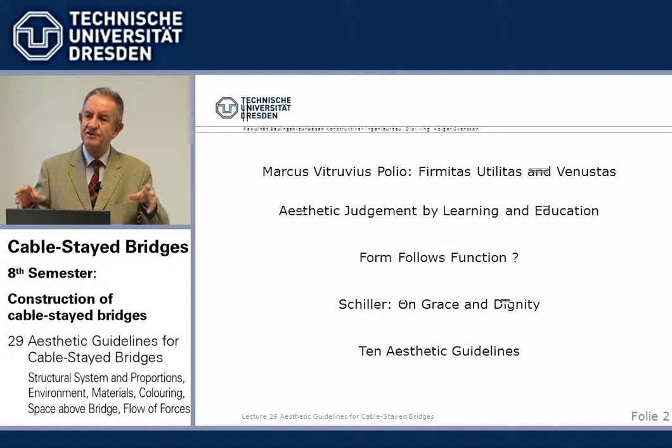And he comes to the conclusion that a beautiful structure has to fulfill rational requirements, form follows function, as well as more felt requirements. So I like to say he combines the two considerations on a higher level, dialectically. This is, I think, the answer. It must be rational and it has to fulfill some requirements from feel.

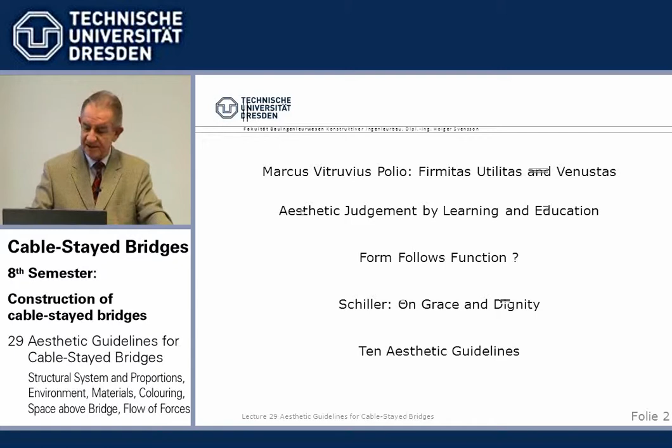We will today deal with the rational requirements, and for that purpose I have developed or summarized 10 aesthetic guidelines which can be used to judge a structure. It's not a recipe for, like, a cooking recipe - thou shalt apply these rules and then you will reach a beautiful structure. No way, this can't be done. But it can be helpful if you're sitting with a design or looking at another design to have a way to check various points whether they are fulfilled.

And by constantly looking and judging structures, that is what I call learning aesthetics, by being aware what is beautiful and what is not and why. So these 10 guidelines, from clear structural system to, I always say, above all, simplicity, we will now go through with examples.

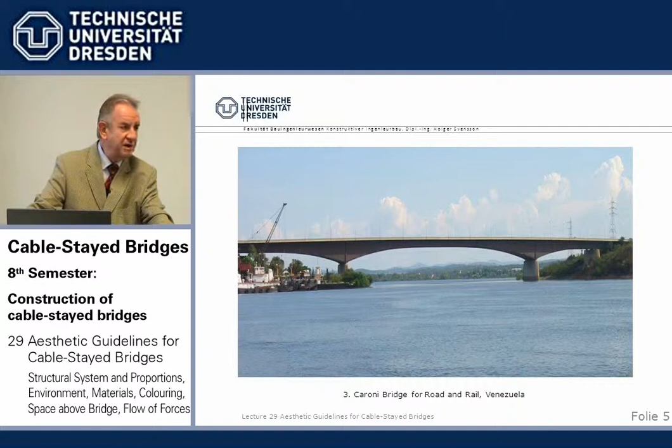A clear structural system is a requirement so that even a person uneducated in structural engineering, when he looks onto a structure, feels there is a right flow of forces, or a layman also has a fine feeling if there is a wrong flow of forces. So a clear structural system - we start with a continuous girder, deeply haunched. This is for road and rail, and it's very clear how the loads are transferred by bending, and where the biggest bending moments are over the piers, there is the greatest depth, most material.

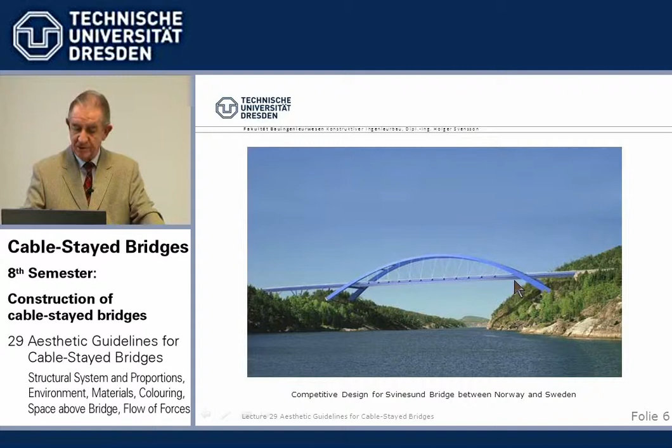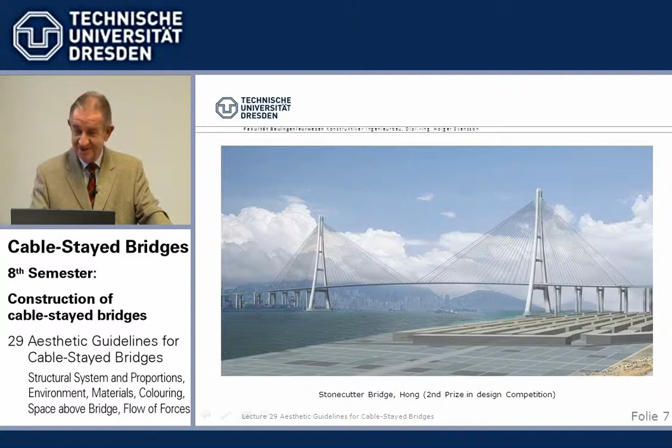A cable-stayed bridge shows a clear system. We have a light beam hung up by towers, and the connection is done by cables. This, by the way, is a second prize for the stonecutter we did. We didn't win, we were runner-up, but it still hurts. I think it's a beautiful bridge we designed there.

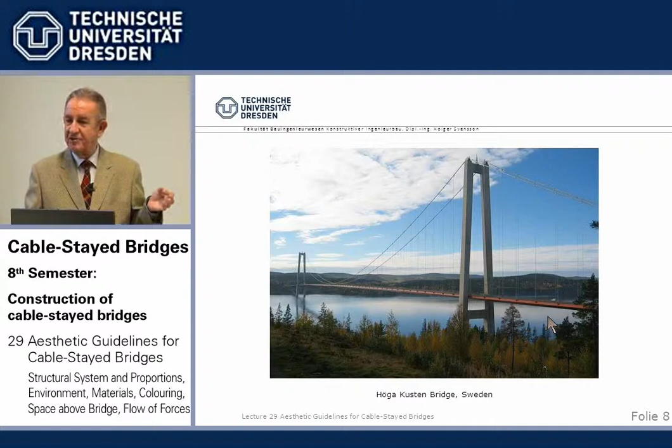The depth ratio above the piers and in the center should be close to 2 to 1. And the second rule is the depth of the beam in the center and at the piers should be the same, and it should run horizontally, as a tangent, with the underside parallel to the top into the end structure. If you just follow these rules, 2 to 1, same depth, and ending up parallel, you will nearly always design a good looking haunched girder.

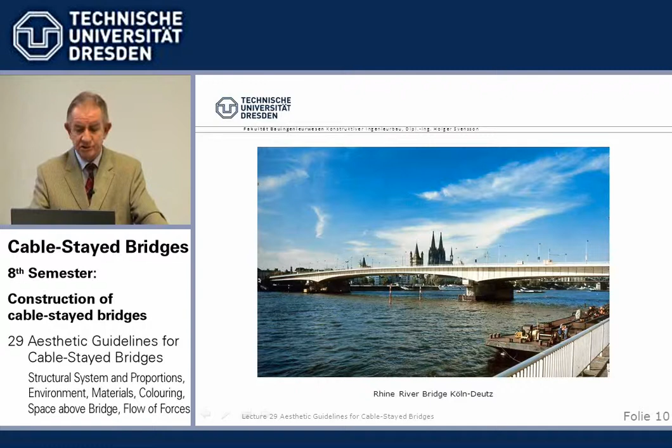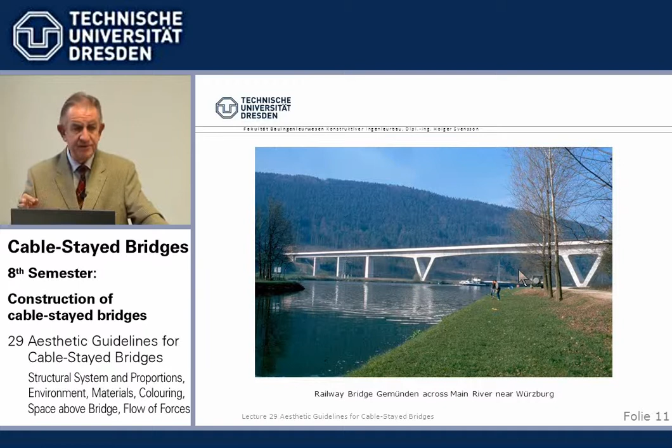An arch bridge also has simple base rules. Again, we have the rule 2 to 1. The ratio between the arch depth and the beam depth should be in the ratio of 2 to 1, or 1 to 2. It doesn't matter.

It can be the other way around. You can have a heavy arch which also carries the bending stiffness, and a light roadway slab just hung to it. Then the arch has 2 and the beam has 1. But you must not use the same depth for the arch and the beam. 1 and 1, if you do that, it looks dull. You need a certain contrast inside the structure. So never make it 1 and 1. 2 and 1, this way or the other.

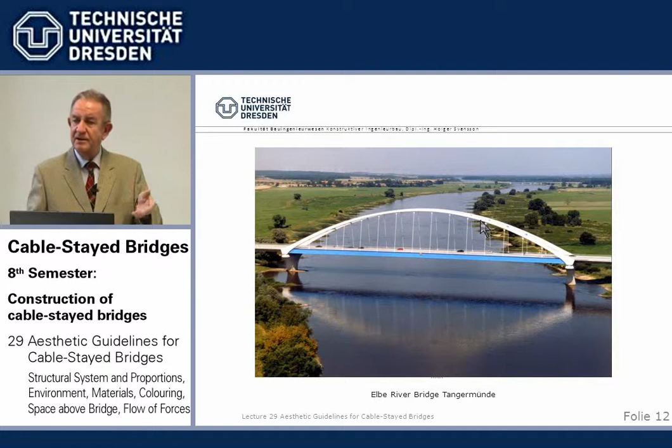And of course, color here can help. Dark color underlines the thickness of the beam, and light color highlights the slenderness of the arch.

Next rule, good order. Very important. We must minimize the different directions of members in a structure to a minimum.

Good order can easily be demonstrated in the arrangement of stay cables for cable-stayed bridges. The simplest way is the harp system, cables in parallel. And if we have only one center plane, there are no intersections, nothing. That's the simplest arrangement of stay cables you can have.

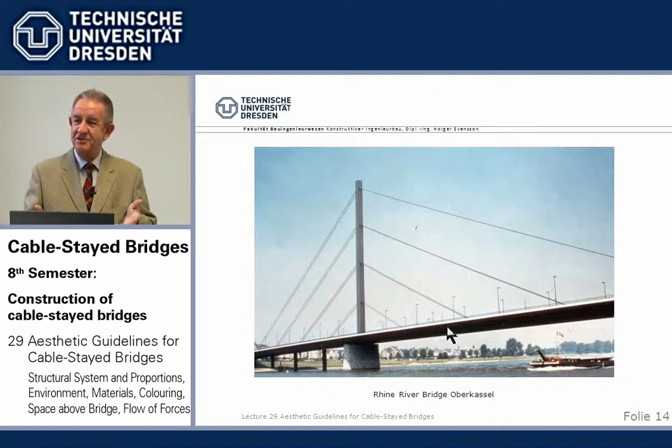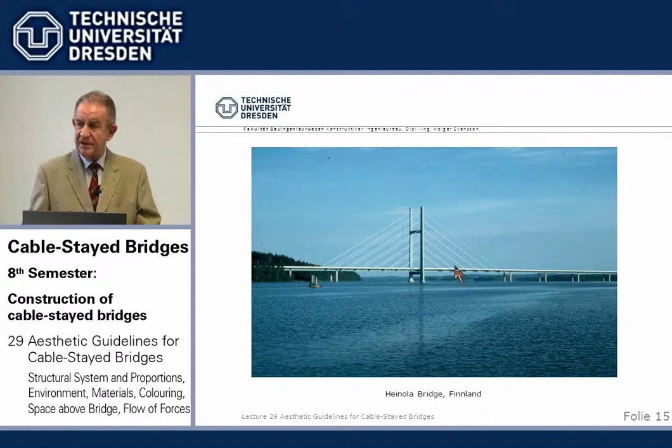Also, when you have two cable planes in a harp arrangement, there are no visual intersections even when viewed skew, from an angle. That is the big advantage of the harp arrangement.

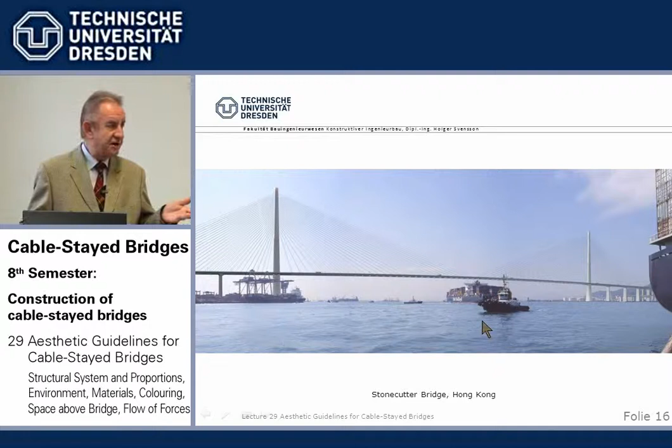Now we come to the fan. You will remember from earlier lessons that the fan arrangement is a little bit more economical. It needs a little less cable steel and less bending in the tower, so it's the usual system. And if we have, like here for Stonecutters in Hong Kong, just one central plane, there are no visual intersections of the cables, and it looks very orderly.

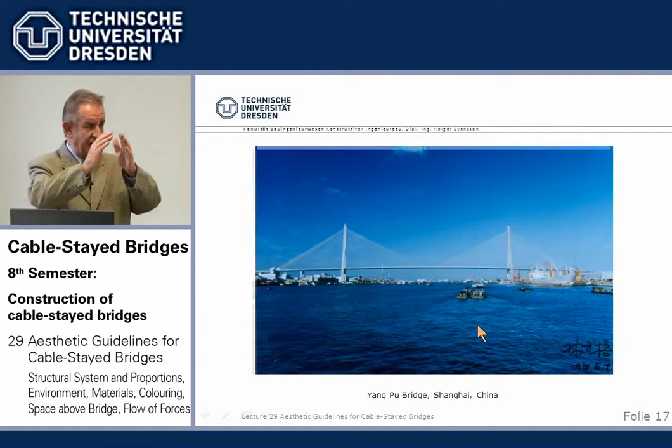However, when we have two cable planes in a fan arrangement, we get visual intersections between the stay cables when viewed from the side. This can, however, be mitigated firstly by using an A-tower, because then the cable planes at the top are very close together, as is the case here for Yangpu, and intersections become less.

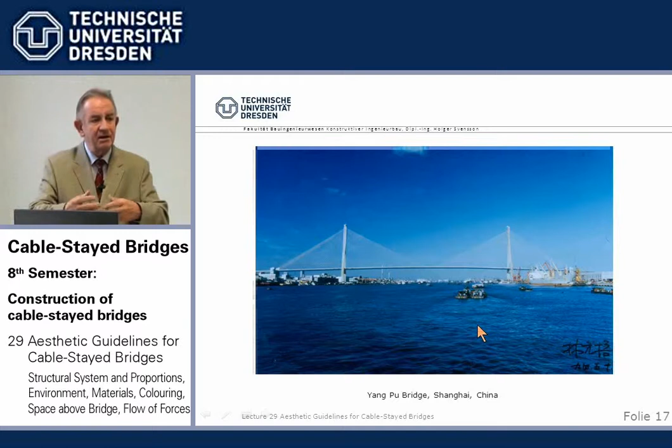Secondly, as Professor Leonhardt used to point out, if we then have many stay cables, like Yangpu, which was a world record in 1994 with 602 meters, the many cables appear like a veil, ein Schleier. So in this veil, these intersections somehow disappear.

4 planes of stay cables we used for the Baytown Bridge, because we needed 2 independent beams for each direction of travel. So even here the towers are designed as simply as possible. I don't think you can design simpler than a pin, which we didn't want. You can design simpler A-towers than we have done here, with constant wall thickness and all that. So that gives the repetition, gives an impression of order.

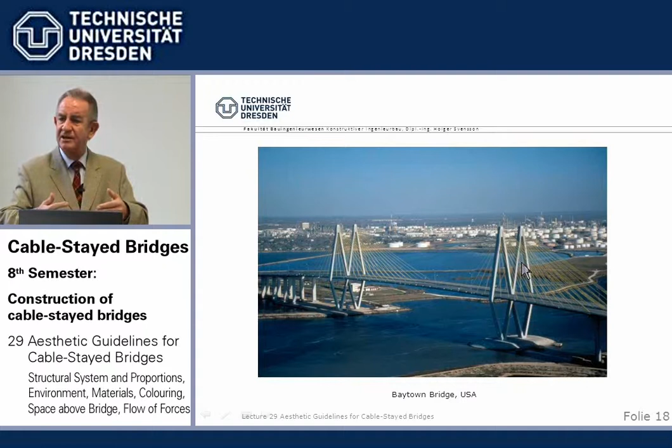And the 4 planes of cables, of course, have the problem that we have visual intersections that cannot be discussed away. But if the bridge is big enough and we have enough, many cables, we approach again this veil impression.

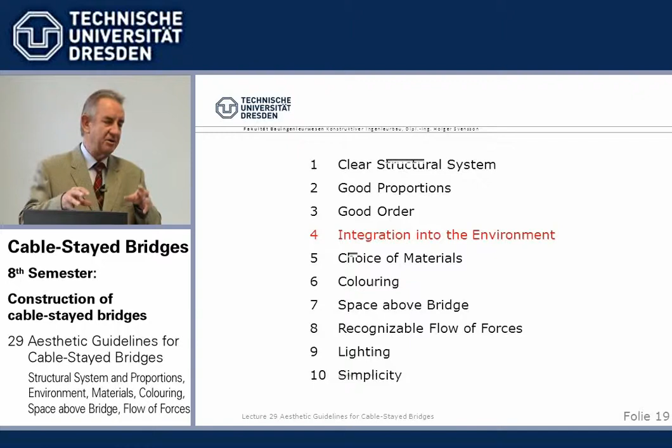Integration into the environment is very important. If you have to design a bridge, you have to go to the site. If you don't do that, if you design especially a major bridge, but for every bridge, just in your office, it's unprofessional. You have to go to the site and find out what is the special feature of this particular location. There normally is one, maybe not easy to detect, and you can only find it if you're there. So go to the site before you start the design to find out what is the special characteristic of this particular site, so that the bridge can be integrated into this particular environment.

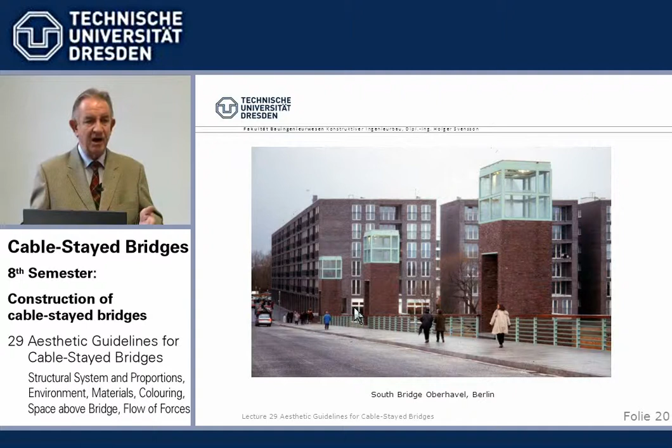In this case, South Bridge Oberhavel in Berlin, the buildings in brownstone were existing when we had the task, together with the excellent architect, Professor Walter Nöbel, to design a bridge here. As a result, we took up the piers on the side to support a special lighting system, because it's mainly pedestrians. At the end, it looks as if the buildings and the bridge were designed together, mainly by the use of the same brownstones for these prominent pier extensions as used for the original buildings. So I think that's a good example of how we can integrate, in this case by use of the same material, into the surroundings.

Another example is the railway bridge Humboldt, across the Humboldthafen at the new main station, formerly Lehrter Bahnhof. Schlaich and Gerkan Marg designed this railway station, and the bridge runs through and had to be concrete also, because those are the areas where you walk on the rail in the station.

An arch bridge looks very well, and so in this case the requirement that we normally use concrete for compression and steel for bending was reversed, because here we have steel arches. But because this had to be concrete, and one wanted to integrate this bridge, which runs into and through the station, with the steel and glass station design, this was chosen. We did the detailed design on the steel part, and I can tell you it was a hell of a job, very difficult. But in the end, from the point of view of integration into the environment, it's a good example.

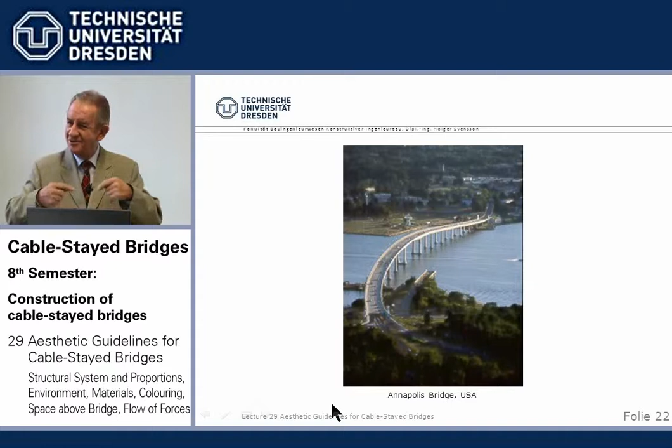There was an existing bridge which had to be removed to build a new one there. We were the only ones entering with a very simple bridge, we think well designed. All the others had load-bearing structures above, be it arches, cable-stayed bridges, things like that - all not necessary, since these spans were good enough. By respecting the Naval Academy in the back and trying to design a subdued, visually low bridge with some detail considerations, it's curved and all things like that, this leaves the Annapolis Naval Academy in its own right. And thanks to these considerations, we won the competition. Myron Goldsmith, a quite famous architect in the US, was one of the judges, and some others, and they saw it exactly the way we had designed the bridge, so we felt understood.

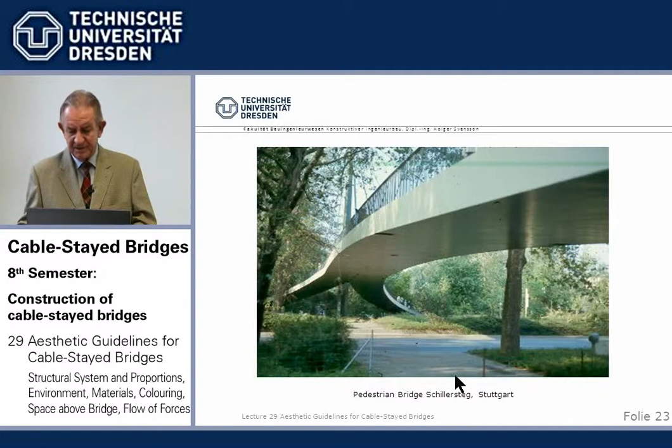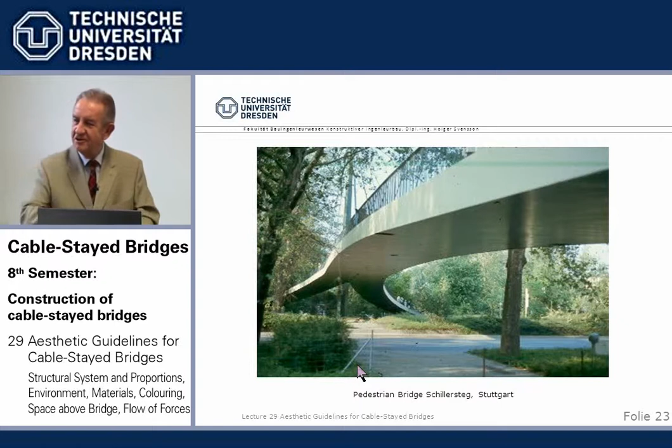Another nice example is in Stuttgart: one of the very early pedestrian cable-stayed bridges, around 1960, across Schiller Street. Before that you crossed the road on level, and there were two natural paths bifurcating into the park, so this bifurcation was taken up in the bridge design. One could have done it straight, but no, the idea was to follow the environment. I crossed over last week when I was in Stuttgart, and it just fits in a very nice way between the parks - another way of fitting the environment.

Choice of materials can have an important aesthetic effect.

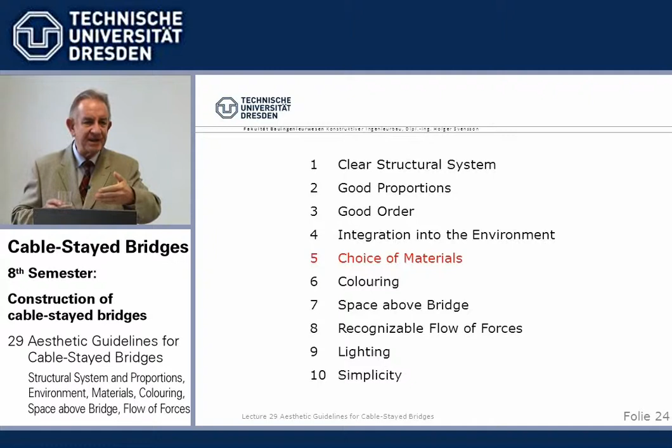This is a little pedestrian timber bridge I designed very close to where I'm living now. I did that 10 years ago, before I knew I was moving to Zeuthen in the south of Berlin, across the Dahme River, beside the Autobahn.

On one hand it's light, compared with a 60-meter clear span, other timber structures are much heavier. The lightness is enhanced because we used steel for the end frames quite consciously, since that's where the big forces come, all the wind transfers and so on have to be taken there. Normally when that's done in timber too, it gets heavy and ugly. So we said timber is nice for the forces here in the span, but here at the end, where we have the heavy frame bending forces, the appropriate material is steel.

Why not? We painted it differently, not in brown. We didn't try to hide it, but used blue as a typical steel color, and brown for timber. This is the appropriate use of materials, because now the end frame has roughly the same dimensions as the timber, and it doesn't stick out as rather heavy. So, using the materials as most appropriate.

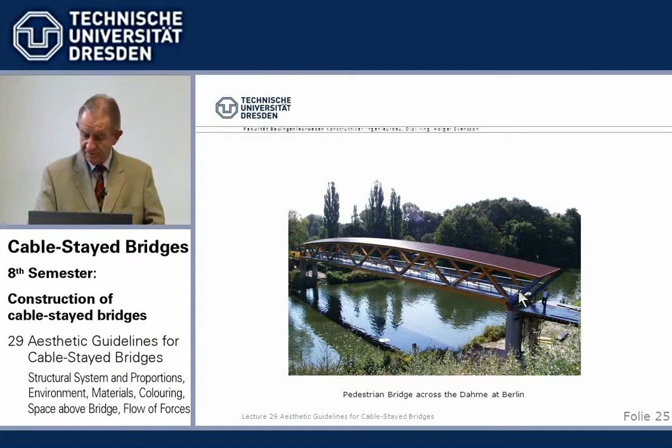I come back to the Annapolis Bridge. Here we have a solid foundation, clad with natural stones, heavy. Then we have the uprising piers given a curved shape indicating the rising, and on top we have a lighter steel structure as the beam.

So use of materials from the solid foundations, stone-clad, to the uprising curved concrete piers, to the rather light steel structure — a typical way from heavy to light, using natural stones, concrete, and steel.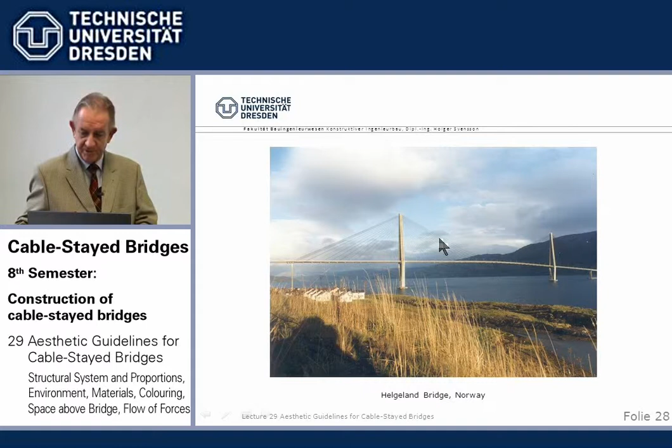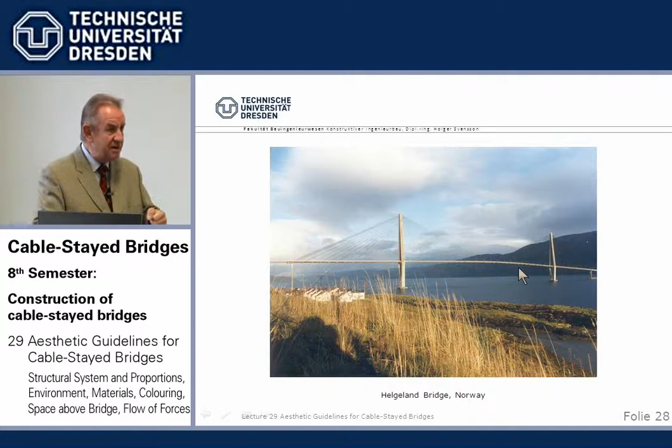And we see here, you've heard it before, slenderness 1 in 350. These concrete compression members, if supported against buckling, can be made very slender and look well. Concrete doesn't necessarily have to be heavy — you just have to use it the right way.

Another proper use of materials, the Rhine River Bridge at Flehe. We have here what I call a hybrid cable-stayed bridge. We have the relatively light steel beam across the river, 320 meters or so, and we have the heavy concrete approach with 60-meter spans where we anchor the stay cables, and of course the heavy concrete serves as a counterweight, as kentledge, for the steel main span.

If this configuration is required — a main span over water and a side span — this is normally a very effective use of materials.

Coloring is an important factor, has to be used with care, but when done properly it will enhance the view, the appearance of a bridge.

Very white cable-stayed bridge, the Dee River in Wales. The only tower I'm aware of right now which is completely made of precast elements with special white concrete — it's not painted, it's white through and through — white concrete for the beam and white colored cables. I have never done this because with time it will become dirty. But it looks beautiful in the morning when you open it, especially when the sun shines.

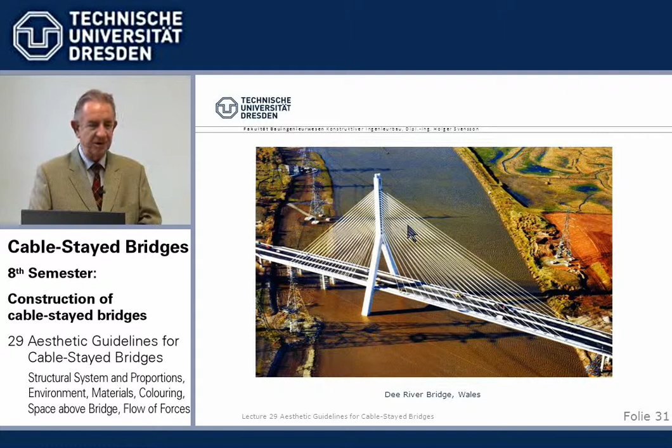So what I have used, especially for stay cables, was what we in Hamburg used to call marine white, or broken white, off-white, or whitish — not the real white, because it becomes dirty and you see it very early. But whitish, we'll see it, I prefer. This is probably the most white, or the whitest, bridge I know of.

We used yellow cables in Texas. That's a decision that normally the client reserves for himself, since everybody can judge the color — it doesn't need to be a bridge engineer. But we were quite happy to use a yellow color here. That's Texas: strong sun, deep blue sky, and I think the yellow appears well there.

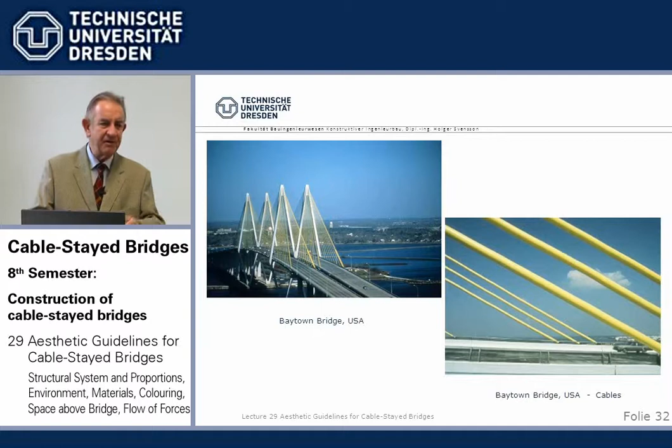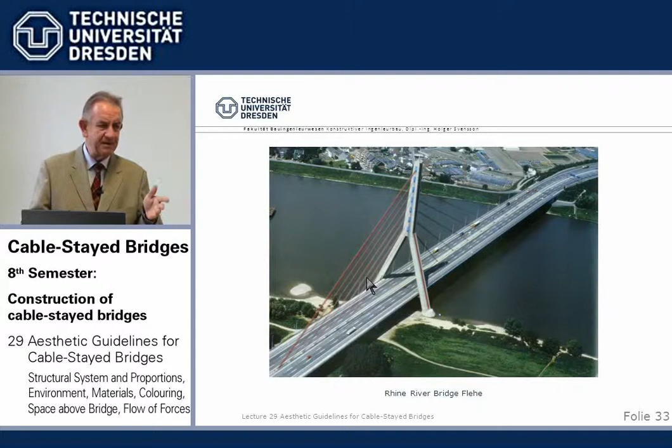Rhine Bridge Flehe: the locked coil ropes are painted, as you know. In this case it was painted red, though the picture had to be improved and the colors have changed a little. What we use is, in German, Mennige, or red lead in English. It's a red which is not clear, but more brownish, Mennige red. The colors are not completely right, but that can be nice.

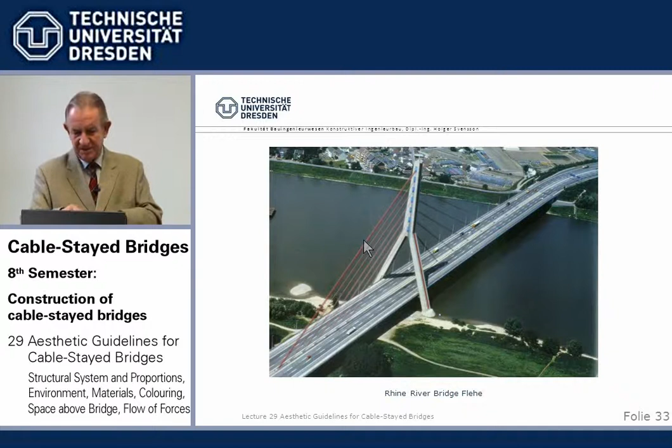Space above the bridge is something not quite obvious in what we mean. The point is that with most bridges, when we pass over them by car, we do not realize we are crossing a bridge. Of course if there's a tower or an arch, we see it, but normal bridges we don't recognize, except sometimes long, high bridges if we approach them on a curve, then we can feel there's a big bridge. Now we cannot make artificial curves to help us see the bridge, but we can try to indicate at the bridge ends with some appropriate structure that we are entering or leaving a bridge.

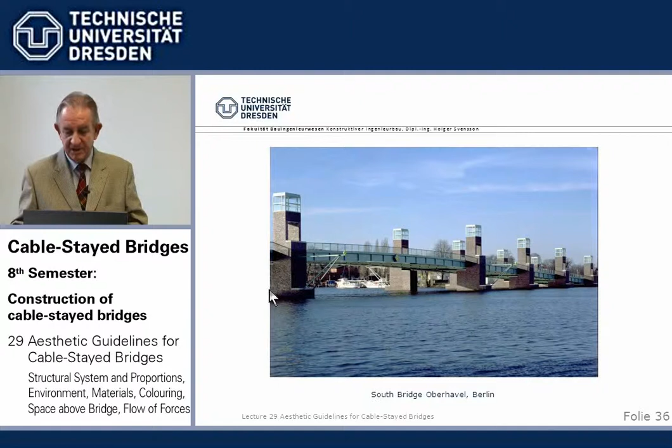That's one consideration. I mentioned the South Bridge early on as fitting the environment. In this case I was quite involved, and I know how the design developed. We had the piers underneath, then the lamp posts, and then there was special lighting, and I think the architect said, why not take this up? This type of piers growing on the sides above the bridge makes us aware that we're crossing a bridge.

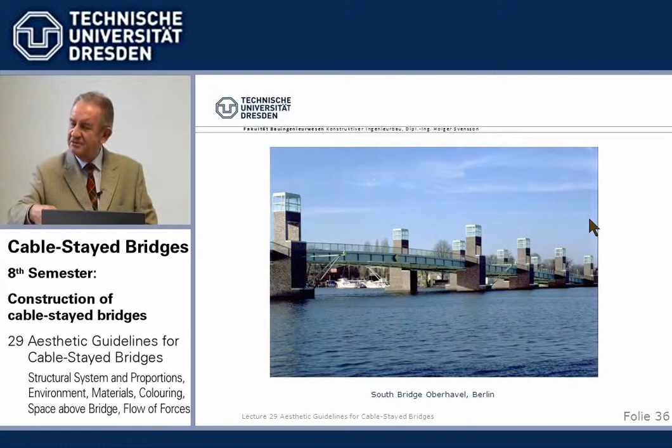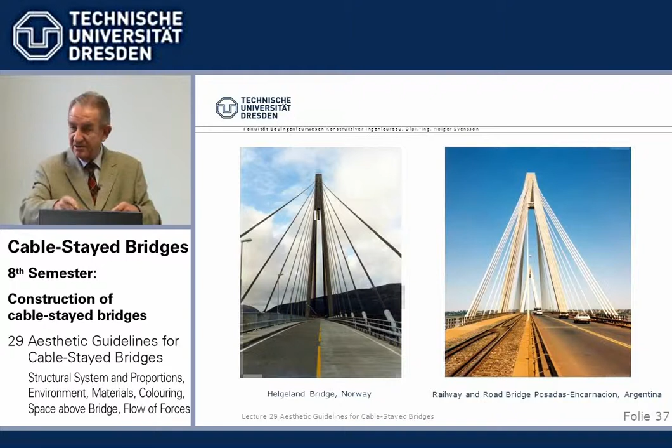That was not the purpose exactly, there were other reasons, but it was in our mind that it's good to indicate the bridge. Naturally, with a cable-stayed bridge, we have a structure above, and as a driver you will see it. A-towers, which have many advantages as I've told you different times, have another advantage: they form something like a tent. If you go through this tent you feel safe, it gives you a good feeling, and you can recognize the cables. Otherwise, sometimes that's not possible.

Two examples, one negative, which I normally have avoided. I've only given good examples, but I think this demonstrates it well. If I criticize something, I prefer to do it with my own bridges or LAP bridges. In the early 60s and 70s, the freeway Heilbronn-Nürnberg had to cross the Kocher Valley, and the slopes were considered prone to sliding. So initially it was said piers should not be placed in the slopes, because they creep.

That meant very long side spans, and Leonhardt, very early on when I started in Stuttgart, designed this, which would have been a world record cable-stayed bridge at 650 meters. At that time models were built; there was no computer visualization. Either you had an architect paint it, or you made models. We normally had an excellent model builder. He made this model and photographed it, and that's what you looked at, and it looks very nice.

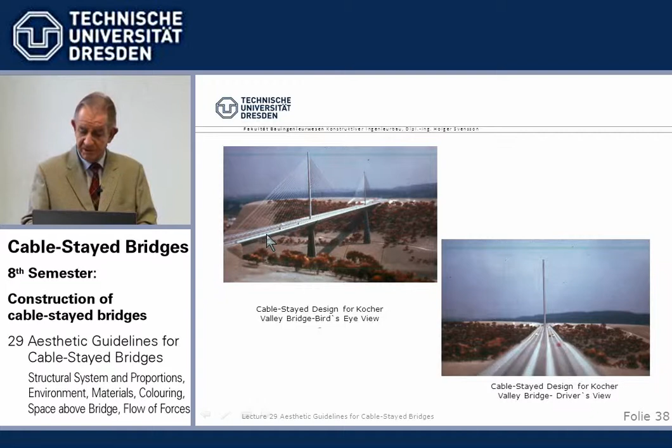One reason I show you here is to recognize it. Very important: a recognizable flow of forces in the overall bridge. As I mentioned before, even non-engineers have a fine feeling for whether that's a plausible run of forces, or whether the forces are, as we say, taken for a ride.

One reasonable approach was a design we did in the US. The tower shape gives a rational flow of forces: we tie them here together, then we have to take the beam in between, and want one foundation again, so we have to take it back. There are deviating forces where the kink in the legs is, so we take those up with a tie, post-tensioned, and we have here the tension members. So I think it's very simple, very straightforward. Flow of forces is apparent to virtually everybody who looks at it.

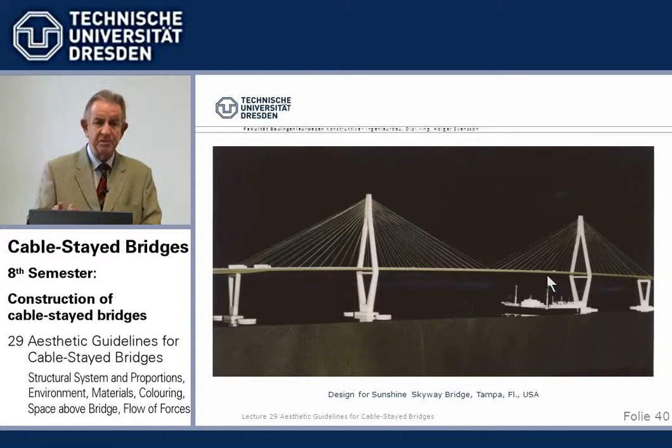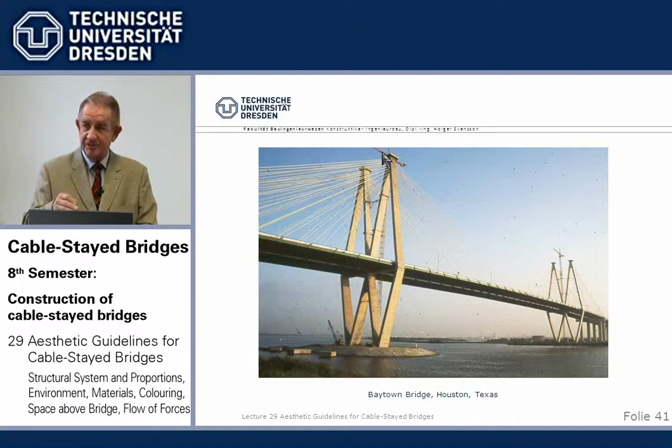We went then with the Baytown bridge one step further, where we said, okay, we need two towers because we need two beams. In this case, we connect them here - and well, it's not advertisement for McDonald's, although people in the US always said that. It's a very rational approach for transverse wind, by truss action, to do it this way with very slender dimensions. So it's designed purely from a flow of forces. It took us some time to come up with this solution, but once we had it, it was obvious - we must do it this way, from the flow of forces.

Here, you remember, the original design had a central tower, but it was too high for the flight requirement from the nearby Düsseldorf airport. So the flight safety people said, not higher than this. It's not our design, but I know how it developed. So what was done then? They cut off the tower here, but if we would have taken the cables then from here, they would have become very flat - 23, 24 degrees - and uneconomical, as I told you.

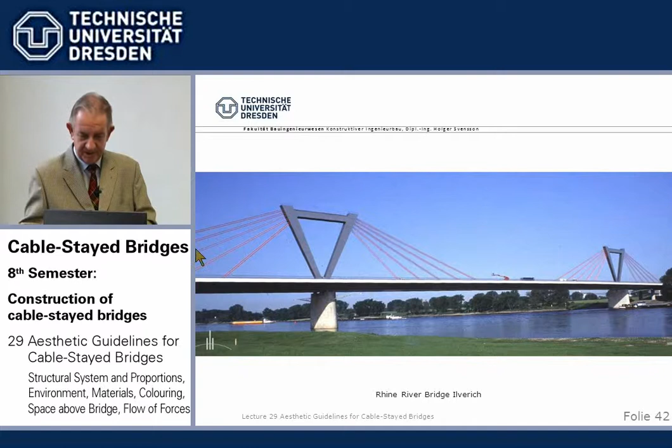If you become too flat, you come to some sort of extradosed and all sorts of funny things. So we said, okay, we want this angle unchanged, but can go only so high - it's rather easy. We make a V in longitudinal direction to anchor the cables in its original inclination, and naturally we need a strong tie to connect the forces here. I think it's rather obvious by looking at it, even not knowing why the hell they cut that off. But the flow of forces - that we have a load here transferred up, tied together here and taken back - I think people can understand.

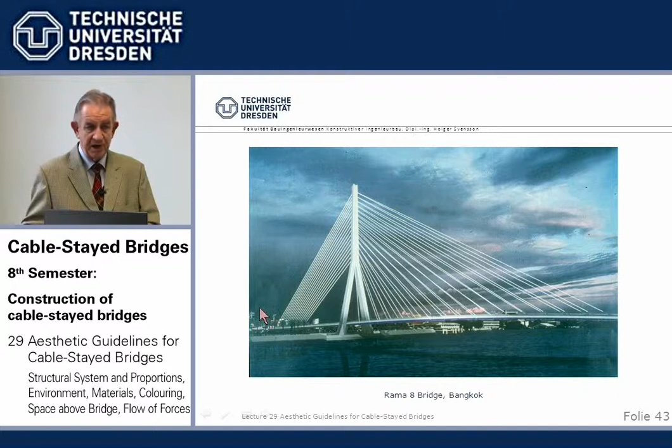Rama 8 bridge, Bangkok. Sort of a hybrid bridge, but the concrete part is reduced to a real Kentledge - a counterweight. A real Kentledge is one big concrete block here and a steel beam here, and it's all taken down to this heavy weight. I think it's obvious by looking at the run of cables how that works.

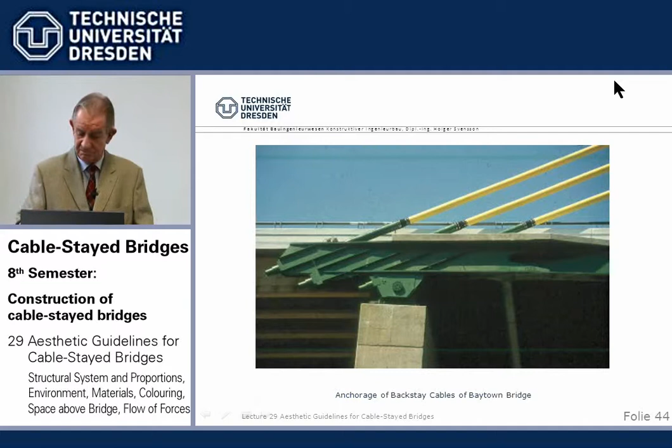Lighting can enhance. However, one word of caution: if you see a certain bridge only lit by night, it normally looks bad during the day. That's my experience. But that's only beside the point.

The Chinese people have a special feel for colors, so this type of blue anchor lighting underneath and yellow on top is quite common. We wouldn't do that in Germany - we would have it more uniform - but the Chinese like to do it. This is Nanpu, the forerunner to Yangpu in Shanghai. Importantly, for many years we have not been using separate lights to outline, say, the towers and things like that, but we use floodlights - uniform floodlights on the beam, and lighting the cables - and that's a good example here.

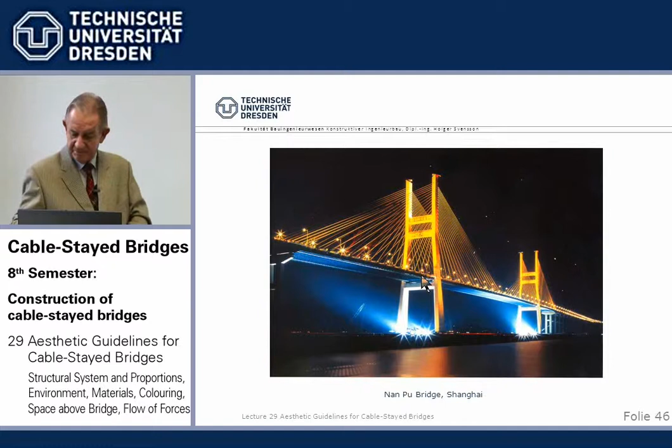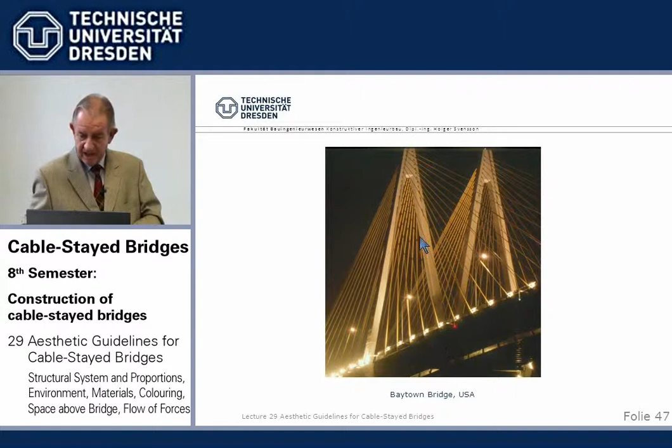Baytown Bridge also has floodlights at the beam which light the stay cables and the towers uniformly.

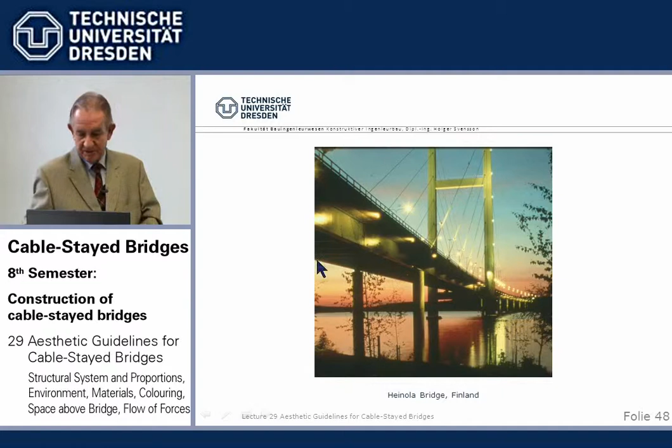Heinola Bridge during sunset, so we have the lit bridge and the sun going down. Here we have individual lights, which I said we don't need anymore and don't use, as long as the navigational authority doesn't require them. Here they said you must have lights for the ships to see. But otherwise it's quite a nice symphony of colors.

Finally, above all, simplicity. The most important item for a bridge. A bridge design is only complete if we cannot take away anything anymore.

The interesting experience is we always start with the complicated, and it takes a long time and effort to get it down to the obvious and simple, where everybody says, yeah, that's clear, that's the way it has to be. But we never start with the simple. One always starts with the complicated and has to put conscious effort into narrowing it down to the pure form where nothing can be taken off.

Example, Weitingen Bridge. I remember well, it was early in the 70s. There were originally regular two-legged piers through the valley to take transverse wind, 120 meters high, on the freeway from Stuttgart to Lake Constance, Bodensee. Then at the end, Leonhardt came and said, no, we don't need that, we make simple piers. You cannot beat this single pin pier for a 30-meter wide freeway cross-section. That is the absolute minimum. Can't do less.

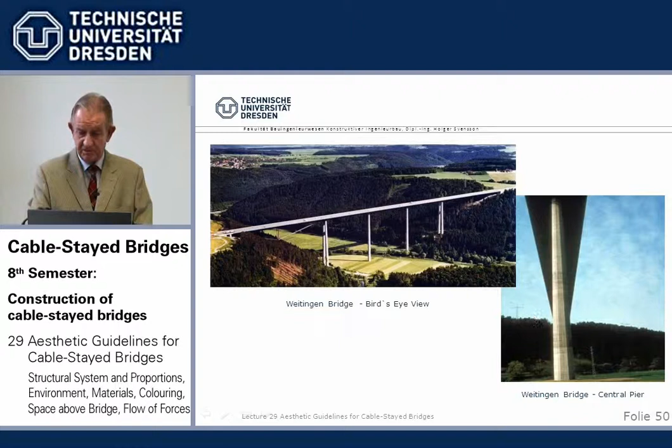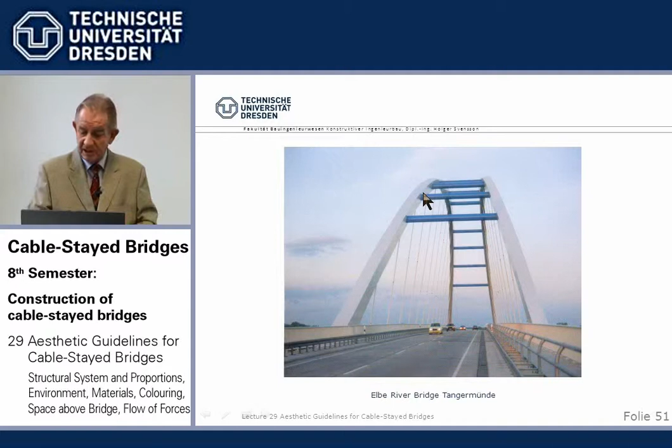Tangermünde Bridge shows we want to keep good order. We want to keep the different inclinations or directions in space of the members to a minimum. Therefore we did not use the usual bracing, which would have introduced many new directions, but used a Vierendeel system, which means pipes in bending, a little less efficient than bracing, but fewer different directions makes a more orderly impression and is the absolute minimum of members we need, except there is another minimum where we don't use bracing at all.

As here, the harbor bridge in Riesa is not a big span and not very high. If we had put bracing up here, even at 4.25 meters, it would look too low, people would feel that way. So purely from aesthetics, one said no, we don't make bracing there at all, but you probably have learned how to do that: you stiffen the arch transversely against buckling, and so it works. It costs a little more material, but it's the absolute simplest arch you can have, with no bracing.

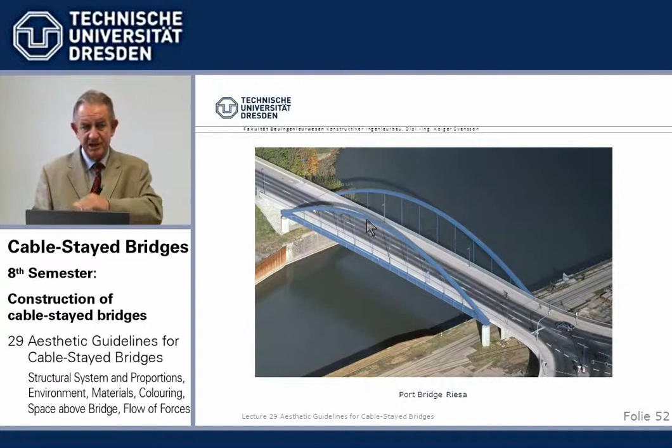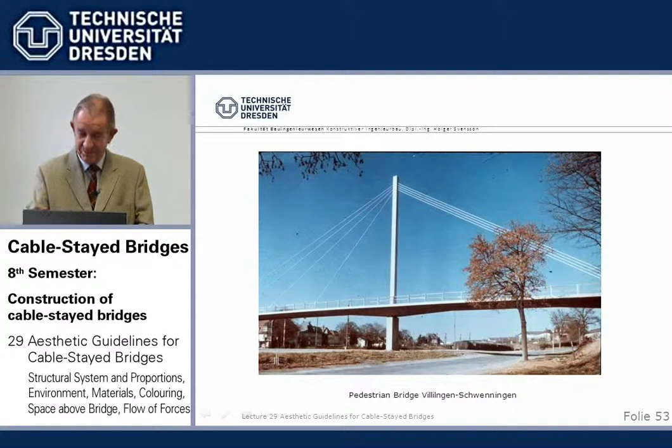A very simple cable-stayed bridge: simple slender beam, several forestays, concentrated backstays. I always use this picture because it has the railing during construction. The final railing, in my eyes, was too solid. It's 1.3 meters high and disturbs the simplicity, so I always show this with the minimum temporary railing instead, which is very simple. This you can't beat for simplicity.

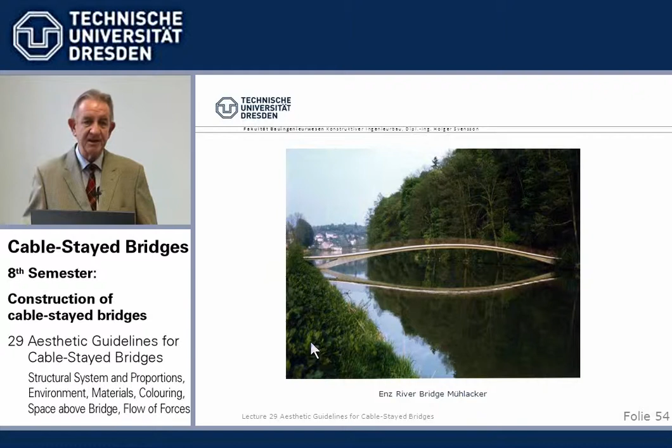Little pedestrian arch bridge near Stuttgart, which Professor Leonhardt designed. We basically have one member, the arch, and a very light, reddish railing. Remember, that's the ideal we strive for with regard to simplicity.

Okay, final remarks: collaboration between architect and engineer. As much as the architect is in charge of buildings and the engineer helps him with designing the flow of forces, the same way the engineer is in charge of bridges, because a bridge is primarily a technical structure, and the architect advises him on aesthetic improvements.

If we have a jury in a competition, there should be a majority of engineers. If not, there are quite a number of examples of designs being chosen and selected which later will not be built because they are too expensive and have all sorts of difficulties. That normally does not happen with a design which has been selected by engineers.

In general, the understanding of many people that aesthetics cost money is wrong. Technical and economic requirements are not contrary to good aesthetics. If one wants to put it very flatly, but those things sometimes remain in the head, it's a question of using the same amount of quantity but distributing it differently. So that makes it rather easy. Aesthetics don't cost money.